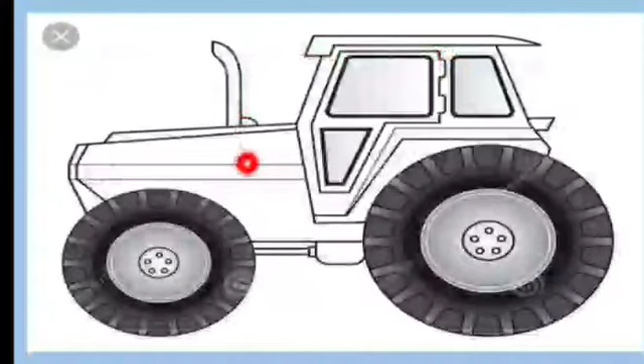So guys, we will discuss why tractor rear tires are filled with water. This is an ordinary tractor. Whenever it is in operation, we will see one important concept, the center of gravity. When we attach any implement to the tractor and the tractor moves forward, the implement creates a negative pull on the tractor, so the center of gravity at the operator is shifted backward.

While loading a trolley, the same happens. The trolley has more than 500 kg weight if it is fully occupied. So the center of gravity shifts from the operator seat to somewhere behind the seat. The center of gravity is the point where the actual weight of the total machine is experienced.

So guys, if the center of gravity changes when the tractor is in operation with an implement or trolley, the tractor will get lifted or turned, so it will cause accidents as well as reduce its efficiency. So to maintain the center of gravity of the tractor, water filling, or the ballasting process, is carried out.

So guys, the filling of water in the tire is called ballasting. We will see why ballasting is done to agricultural tires. Ballast means additional weight. Additional weight is added to the tractor to work more effectively and safely. Adding ballast to the rear tires of your agricultural vehicle makes tractor operation safer in these circumstances.

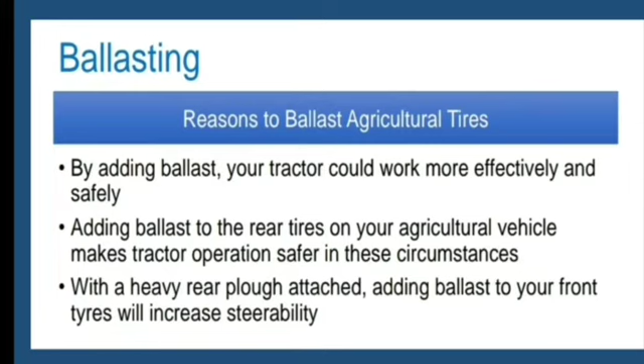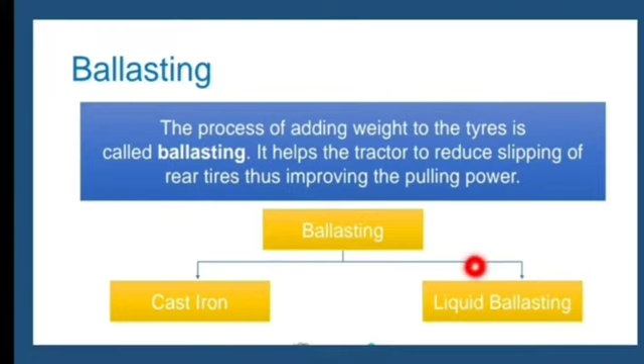With a heavy rear plow attached, adding ballast to your front tires will increase steerability. So guys, the process of adding weights is called ballasting. It helps the tractor reduce slipping of the rear tires, thus improving the pulling power. Ballasting is of two types: first is cast iron and second is liquid ballasting. We will see them one by one.

Cast iron ballasting. In cast iron ballasting, see here, some metal plates are attached to the tractor. Cast iron weights are attached in the front of the tractor as well as at the rear. These metal plates are added to maintain the weight of the tractor.

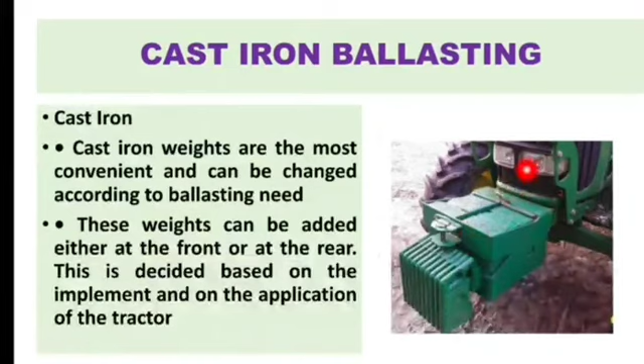Cast iron weights are the most convenient and can be changed according to the ballasting need. These weights can be added either at the front or at the rear. This is decided based on the implement and the application of the tractor. If we are doing plowing operation, we will add cast iron weights at the front, so the center of gravity is maintained near the operator's seat.

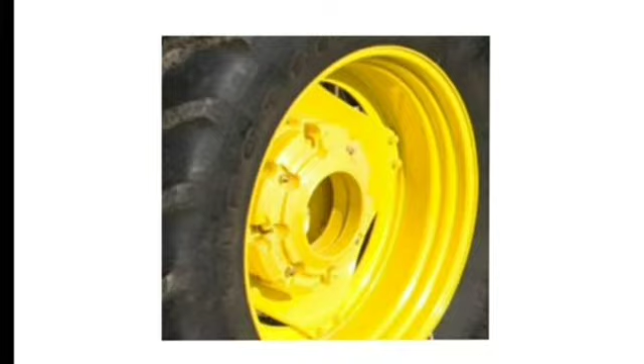These are also metal plates attached at the rear wheel, so that we get definite traction. Then comes liquid ballasting. In liquid ballasting, we can add not any kind of liquid, but the liquids listed below, to add weight to the tires.

Agricultural tire valves are usually of air and water type. Liquid ballasting can be done with the following liquids: first is water, second is calcium chloride, then antifreeze liquid, beet juice and foam.

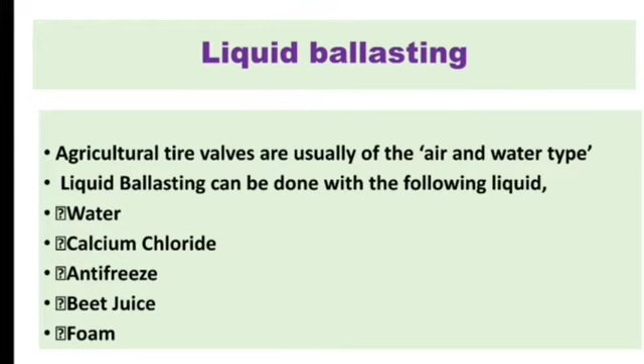As our thumbnail was about why tractor tires are filled with water, we will discuss water ballasting here. Addition of water in the rear wheel is called water ballasting. Water ballasting is done to reduce the slippage of the rear tire and to increase its traction.

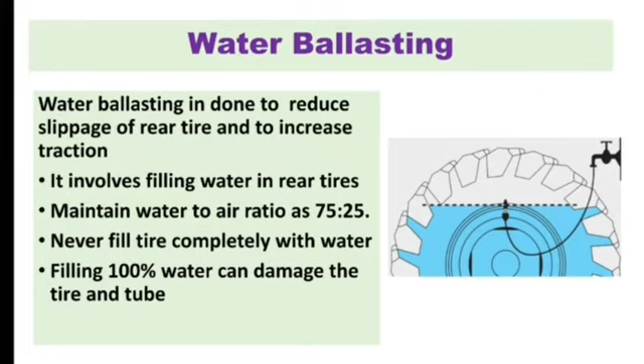Never fill the tire completely with water. Filling 100% water can damage the tire and tube. So this was the disadvantage of filling the rear tire with 100% water.

Now how is the water filling operation done in the tire? First, jack up the wheel, then hold the water filling valve at the 12 o'clock position. Then remove the valve and let the inside air come out. Fill water with force until the tube is completely filled.

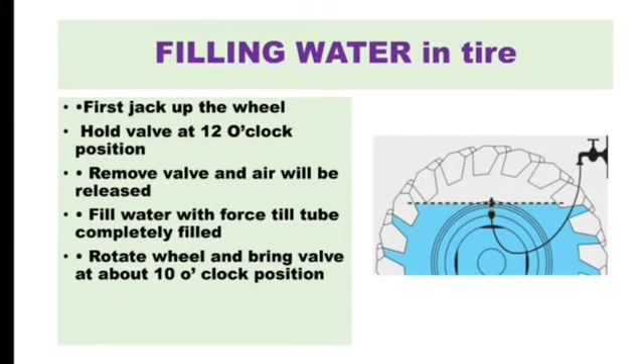Rotate the wheel and bring the valve from the 12 o'clock position to about the 10 o'clock position. So 25% of the water will automatically get out of the tire. The extra water will spill out and approximately 75% of water will remain in the tube.

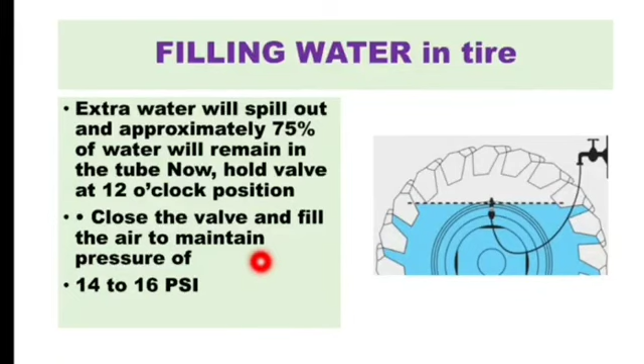Now hold the valve at the 12 o'clock position again, close the valve and fill air to maintain the pressure. With water at 75%, we fill some air so that air pressure is maintained between 14 to 16 psi. So guys, this was the procedure of filling water in agricultural tires.